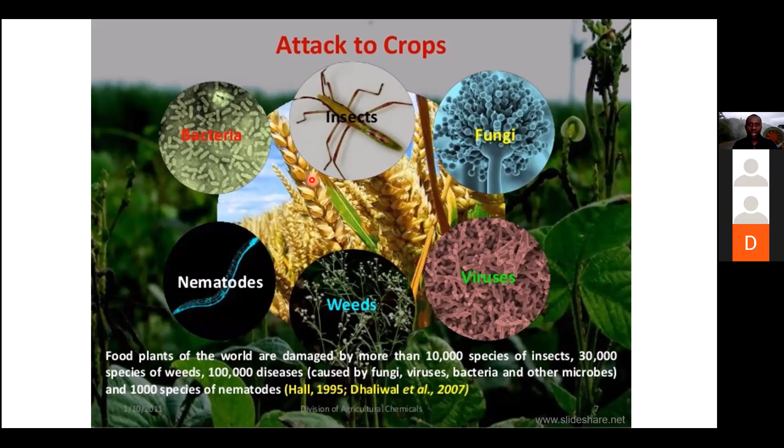However, various disciplines related to agriculture are involved in the fight against these enemies using different tools. At the farm level, various methods are involved in what we term integrated pest management. However, no matter your idea of integrated pest management, whatever the components are, the use of chemicals or chemical control - the use of pesticides - always finds itself as a tool of last resort in protecting the crop.

For that reason, it is also very critical that pesticides are used well for effective pest control the first time. Otherwise, we stand the chance of needing to repeat application and increasing production cost against the bottom line. So we need to learn more about how to do it right, so we can improve or maintain effective application.

For us to be on the same page, we need to establish some definitions here. Stay with me. First, let's look at spray. The noun form of spray refers to liquid that is delivered or driven through the air in the form of tiny droplets. So it is liquid, not gas. Spray is liquid, just that it is disintegrated into many tiny droplets, and the process whereby this disintegration is achieved is called atomization.

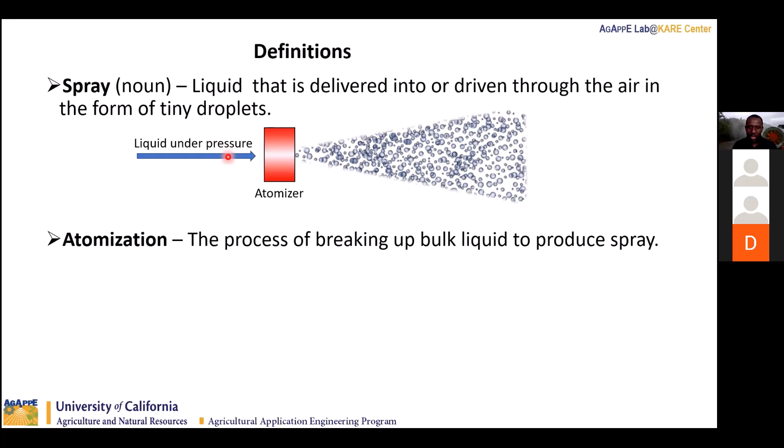This atomization is achieved when liquid under pressure exits through an atomizer. An atomizer is a device for emitting liquid as spray, an example being a nozzle. A quick definition: a nozzle is a device having an orifice through which liquid exits as spray.

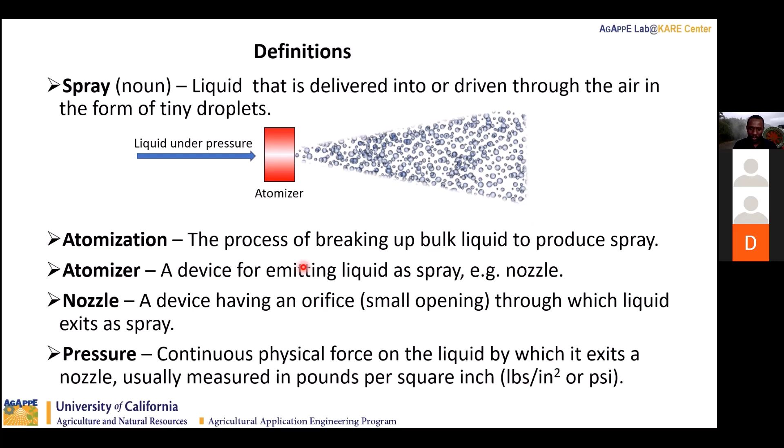Let's also look at the definition of pressure. I hope I'm not running through this too quickly, but my intention is to bring us on the same page by running through these definitions. Pressure is a continuous physical force on the liquid by which it exits a nozzle, usually measured in pounds per square inch, or PSI, in American units, or newtons per meter squared, or Pascal, for metric units. Agricultural nozzles are usually rated at 40 PSI and color coded for easy identification.

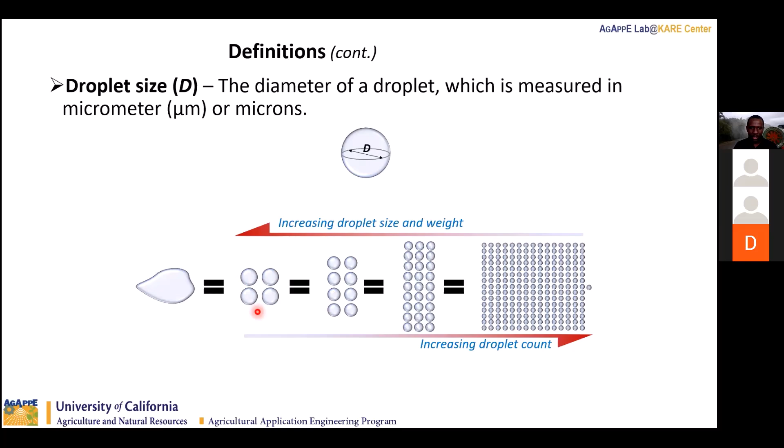On the other hand, a lower droplet count means that less area can be covered by the spray. But finer droplets present a challenge in that they are highly susceptible to drift loss from the application site, and this impacts the effectiveness of the spray application.

Let's consider droplets falling from a height of 10 feet. We can see that a 400 micron droplet takes about 2 seconds to fall. On the other hand, a 20 micron droplet takes 4 minutes to fall through the same distance. So the heavier, or coarser, the droplet size, the shorter time it takes to drop. The smaller or finer droplets will stay airborne longer than the heavier, larger, or coarser droplets.

Also, at 10 feet high, a 20 micron droplet in a 3 mile per hour wind can travel about 1056 feet before making landfall, which is 1/5 of a mile. Whereas on the other end of the spectrum, a 400 micron droplet will travel only 8 feet before making landfall. This also means that finer droplets can linger in the air longer.

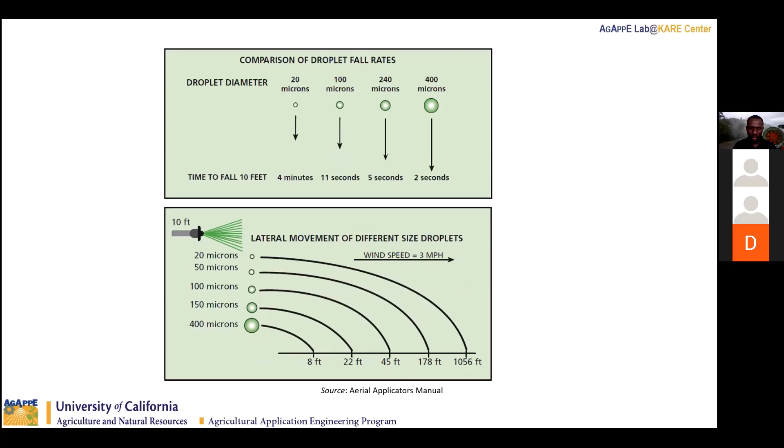Within the same spray, droplets range in sizes from finer to coarser, meaning you don't have the same size throughout - it's a range of sizes. So a representative droplet size is used to describe spray quality. The typical one is what we term the volume median diameter, or VMD, and in some literature you can also find it as DV 0.5. The VMD is simply defined as the droplet size at which half of the total liquid volume consists of smaller sized droplets and half of the volume consists of larger sized droplets.

Here are some examples. Let's assume our spray consists of exactly four droplet sizes, and each of them constitutes or is taking up 25% of the volume. This is how it could look like. The VMD will be a size between the middle droplets, because we can see this is taking the largest droplet that will take 50%. So the VMD will lie between the second largest and the third largest in this case.

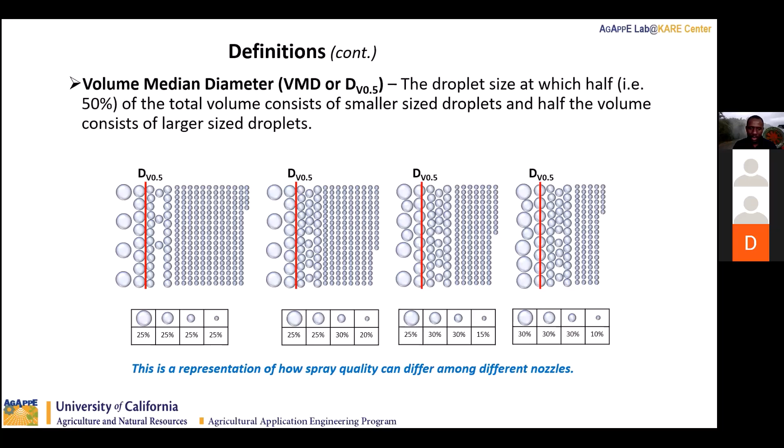The VMD, or droplet size spectrum, is represented graphically using a sigmoid curve, or S curve. Each of these curves represents spray from a different disc core nozzle. Here, D2-13 is the smallest size, while D6-46 is a larger size in terms of flow rate and droplet size. For these curves, the steeper the curve, the greater the percentage of fine droplets and the smaller the VMD. On the other hand, the gentler the curve, the lesser the percentage of fine droplets.

To find the VMD, we draw a horizontal line from the 50% mark on the curve, then draw it vertically down to find the corresponding mark on the droplet size axis. So increasing the nozzle size, in this case from D2-13 to D6-46, increases the VMD from about 140 microns to about 320 microns.

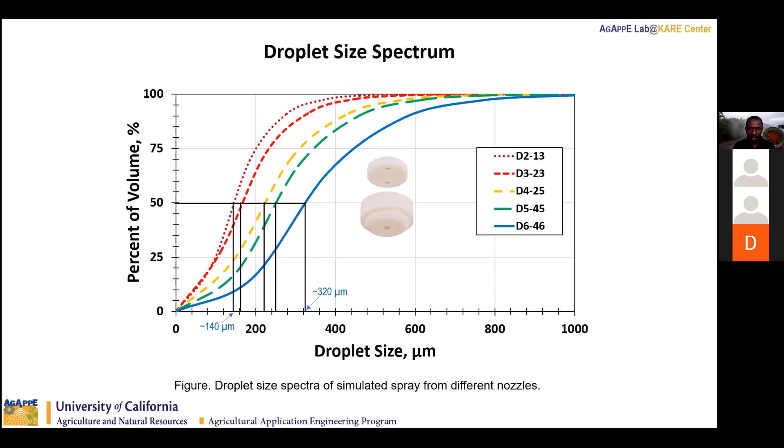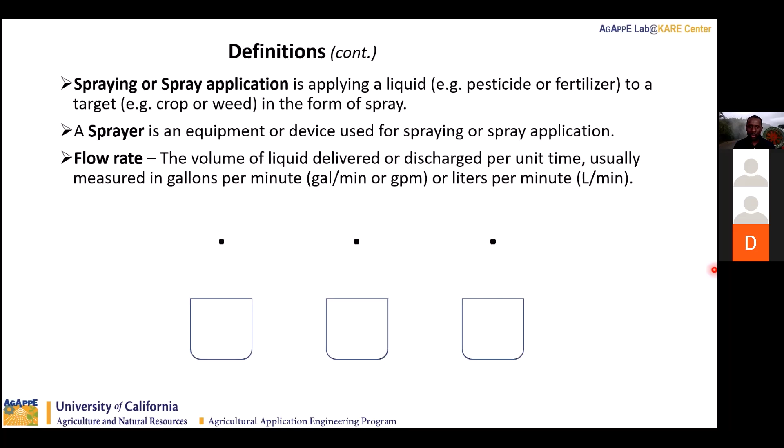So let's try to define it here. It is a volume of liquid delivered or discharged per unit time, usually measured in gallons per minute, or we can also have liters per minute, depending on the units you are interested in. In our application, mostly we use the American or standard units, and we have it in gallons per minute.

So typically flow rate refers to what the nozzle is putting out. Let's consider these dots here to be nozzles of increasing sizes from left to right, and we see for the same time, the bigger size nozzle puts out more volume than the smallest size nozzle.

And then we can also consider this to be nozzles of the same size, but increasing pressure. So the volume discharge corresponds to pressure, and as we increase pressure, we increase the flow rate.

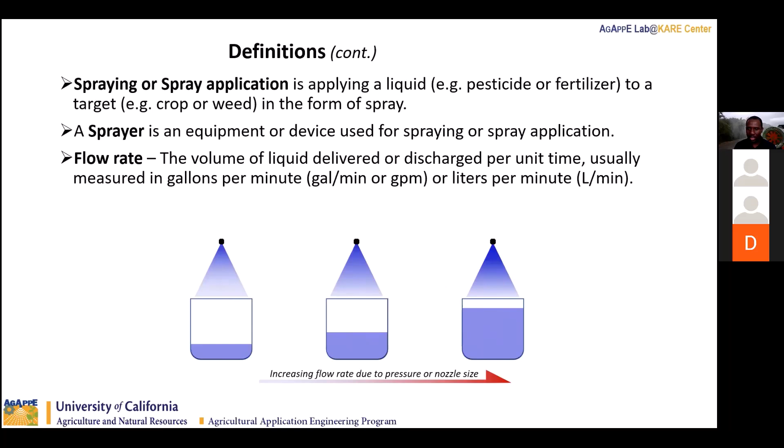So this brings us to one of the most important terms in spray application, which is the application rate, and it has to be understood within context. In its basic terms, it refers to the volume of liquid applied divided by the area covered, or the area intended to be applied to. It is usually measured in gallons per acre, or in metric units, liters per hectare.

And the volume applied can be obtained by multiplying the sprayer output, which is flow rate - a combined flow rate from all open nozzles.

Multiplying that by time will cancel out the times and give us the volume applied. The area covered can also be obtained by first multiplying the swath width—and for tree crops, we'll be looking at the row spacing—times the travel speed, and then times elapsed time. So we can cancel out the time to leave us with the sprayer output and the area rate.

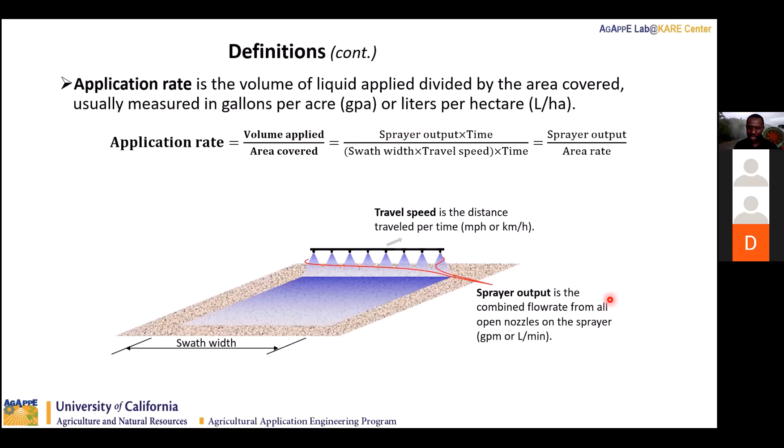So now let's look at spray methods and equipment. We have two main methods: aerial application and ground application. Although I'll be dwelling on air blast applications and so forth, my intention was to just focus on this briefly to give us some background.

For the aerial application, we have fixed wing or rotary wing aircraft sprayers, and more recently, but quickly advancing, we have unmanned aerial drones, unmanned aerial sprayers or drone sprayers, which are being used in some specialized situations. And then for the ground application, we have a boom sprayer, which works similarly to the aerial sprayers.

It applies spray downward from above the canopy. And then we also have air-assisted orchard or vineyard sprayers, which apply spray laterally to tree and vine crops.

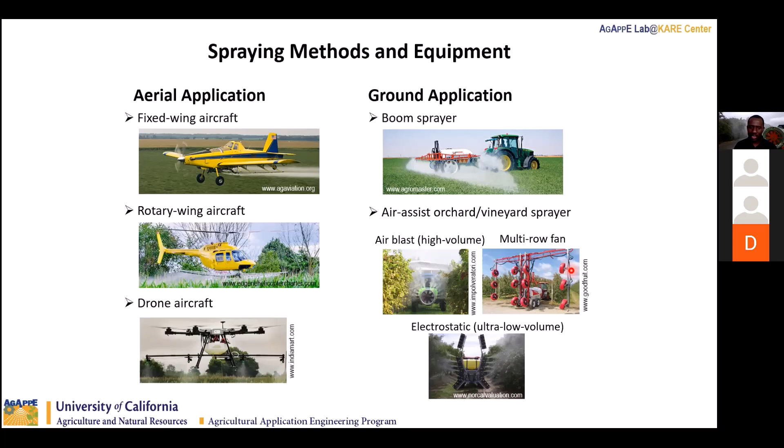So here we have other ground sprayers, like backpack sprayers, backpack mist blowers, ATV spot sprayers, and skid sprayers, and all other types that we can talk about. But these apply spray at a slower rate as there is some working involved by the applicator, so forth.

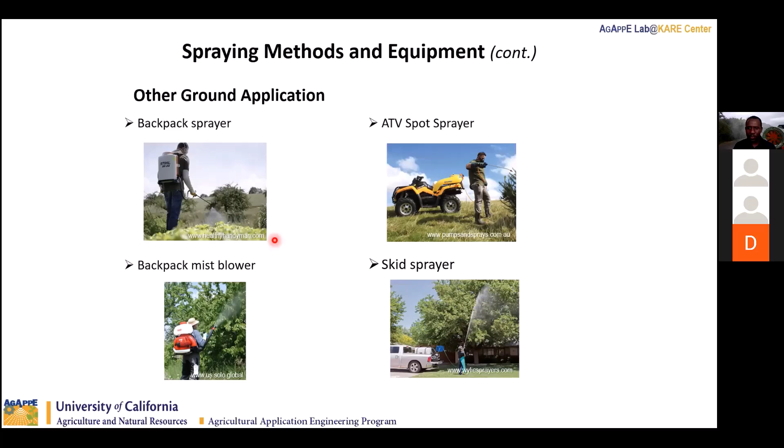All right, a quick poll here before we delve a bit more deeper and get through the ABCs of spray application. And then we'll be moving to calibration basics, as I mentioned earlier on.

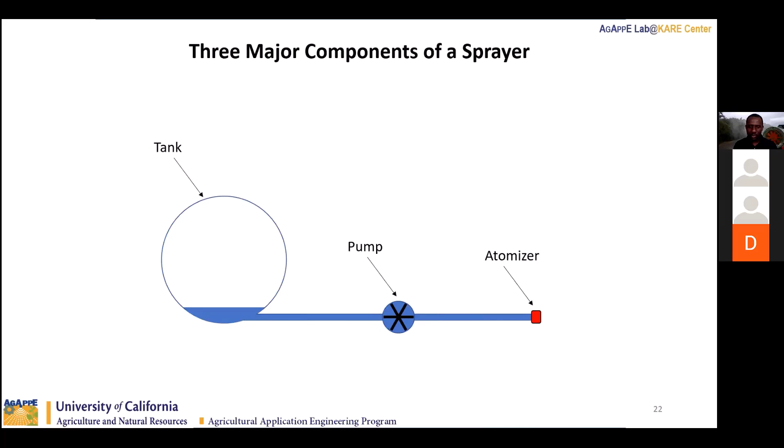Let's look at the pump. Sprayer pumps come in different types. Here are two common examples: we have a diaphragm pump and a centrifugal pump.

The diaphragm pump consists of a diaphragm, which is pushed and pulled respectively by air suction—air suction pulls, and pressure is used to push it. The push and pull action draws liquid into the pump and then out of the pump towards the atomizers. With a centrifugal pump, it consists of an impeller that turns as a drive shaft spins, and this action draws liquid from the tank into the pump, and then out of the pump towards the atomizers.

Now, diaphragm pumps are an example of a positive displacement pump. We have other examples of positive displacement pumps being piston pumps, and then we also have roller pumps.

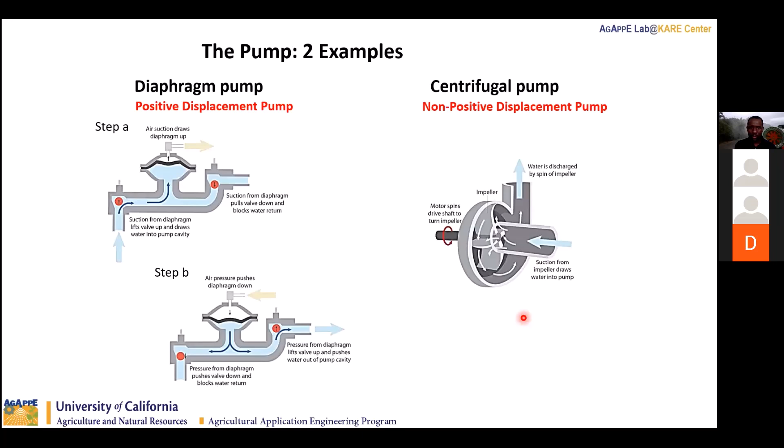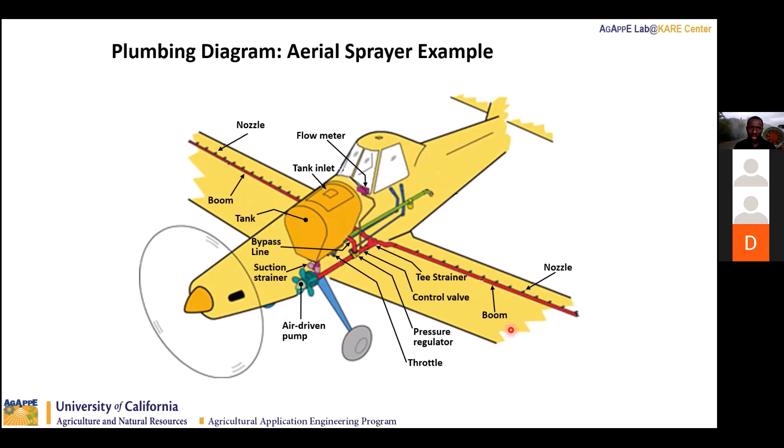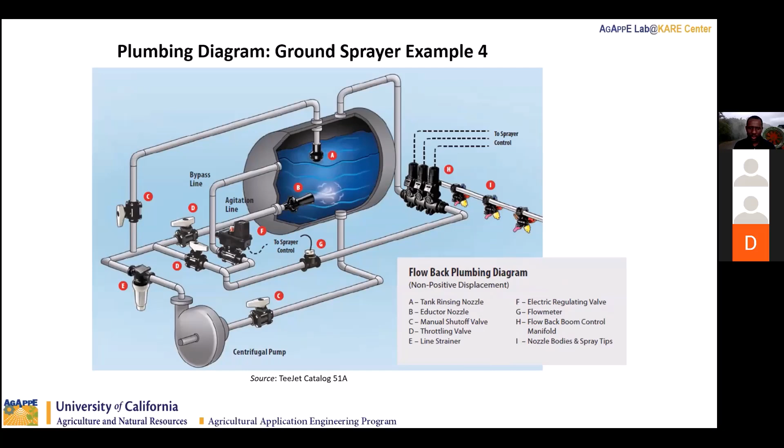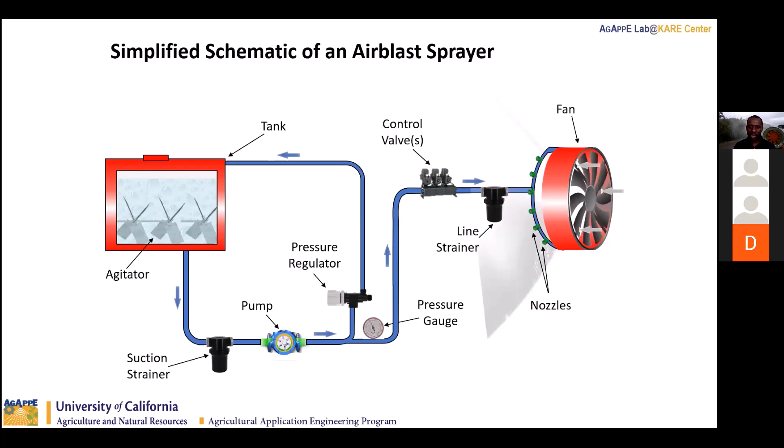The fan draws air and discharges it with the spray, and the air serves as a vehicle for transporting the spray droplets towards the target. So you have the air and a mixture of air and spray going in one direction to the left, and then a similar one going to the right. We are familiar with this, I'm sure.

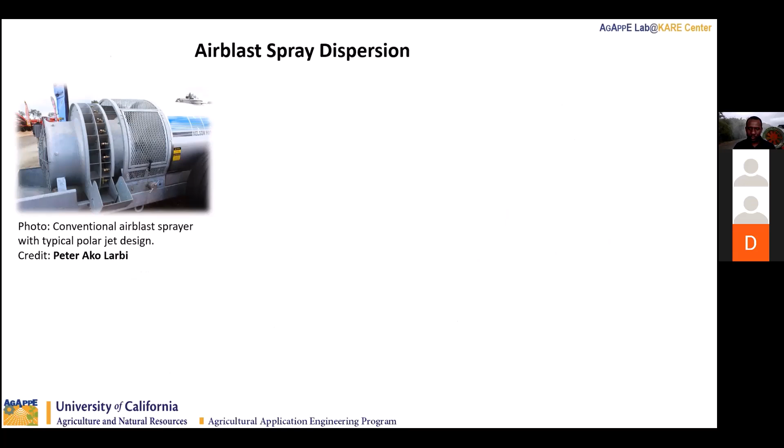Here is a conventional air blast sprayer with a typical polar jet design. And there is also a stationary air blast sprayer, which you can't see very clearly because something is blocking the view—it's standing right here. We can see how the spray is being discharged, how high and also how far from the sprayer the spray is traveling.

Now, if I were to put a tree in the way of this spray cloud, it would become our target tree, and we would expect it to capture the spray. Some of the spray will be captured by the tree. Some, obviously, will get to the ground directly, or maybe indirectly through runoff from leaves and so forth. And others would also miss the canopy.

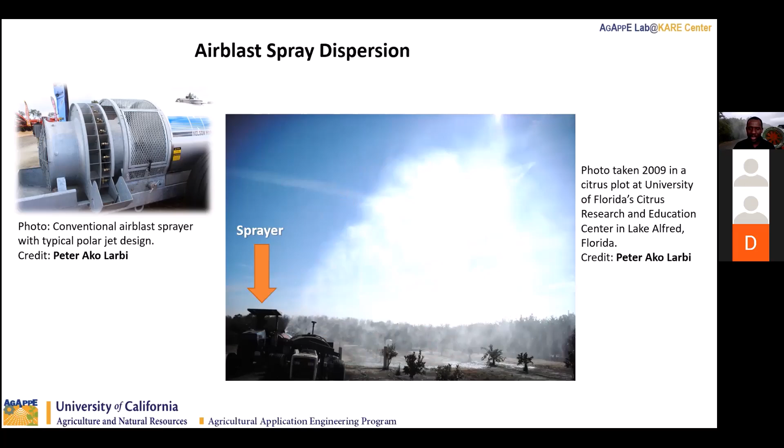So by maximizing canopy deposition, we would minimize the losses—we would minimize ground deposition and potentially also minimize drift.

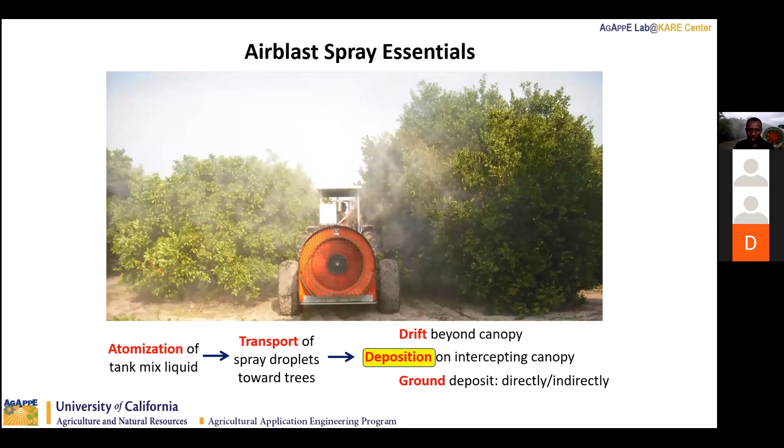And we already know of the effect of wind on droplets. Okay, so this brings us to some considerations for a good spray application. These factors would have to be considered together to result in a good and effective spray application. The operator or the crew plays an important role.

The sprayer condition and sprayer settings play an important role, as does the resulting spray: the timing, the accuracy of the spray volume, and the direction, meaning directing the spray towards the target and not missing it. All that ensures the spray we are applying reaches the target and covers it according to what we desire.

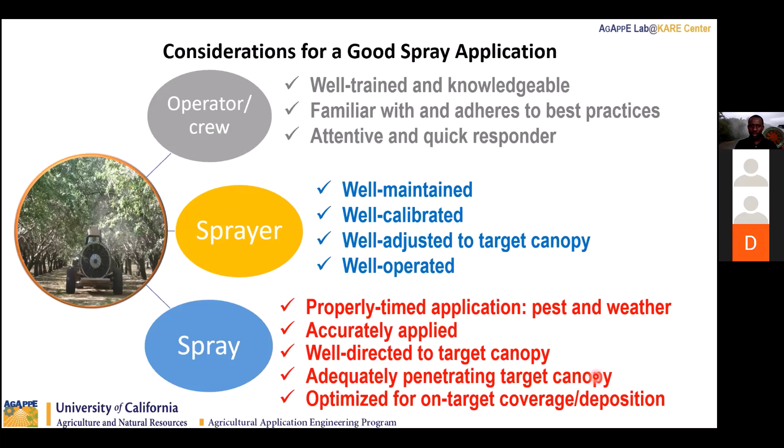Let's take a moment to do poll 6, and this would be our last poll for the ABCs of spray application before we move on to talk about calibration basics.

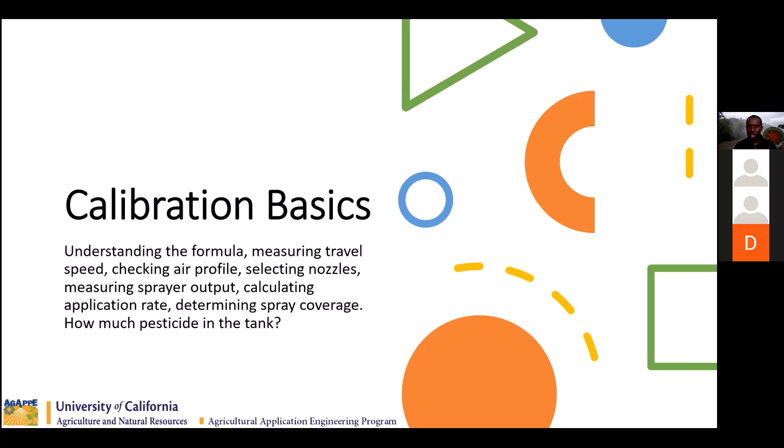Let's quickly define sprayer calibration. What is sprayer calibration? I would say it this way: sprayer calibration is the adjustments made to a sprayer based on measurements taken to ensure that the correct amount of material—that is, a spray mixture or target or active ingredient—is applied.

So it involves measurements, adjustments, and also verification and so forth. There are calculations involved, and you measure to verify that those calculations are correct.

So why do we calibrate? There are a number of reasons, and I'll run through these quickly. First and foremost, calibration is best practice in spray application. Any device meant to do something by design, engineering works drift, so from time to time it is important to calibrate or readjust things. For sprayers, it is critical to make sure the sprayer is doing what you want it to do. So calibration is best practice, and has to be done.

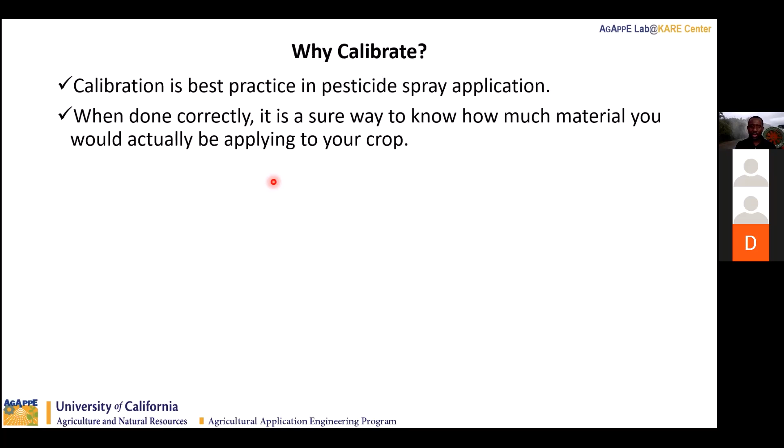When done correctly, meaning you can do calibration incorrectly and have erroneous results to work with, it is a sure way to know how much material you are actually applying to the crop. If you do not calibrate correctly, or do not calibrate at all, this can result in inaccurate application rate, because if it's off, you have no way of telling that it's off. If you calibrate incorrectly and work with that, you might be applying more than you think, or you may be applying less. So it is important to do it right.

It can result in inaccurate application rate and ineffective application in the end, and also illegal residues on treated crops, that is, if you over apply. Accurate calibration will lead to effective pest control while minimizing waste and negative human and environmental impact. This could be debated to some extent, but if things are done right, considering all the necessary adjustments we are going to look at, you should be able to improve or optimize the application. By knowing how much you're applying against the pesticide label, you would also ensure compliance with the law represented by the pesticide label.

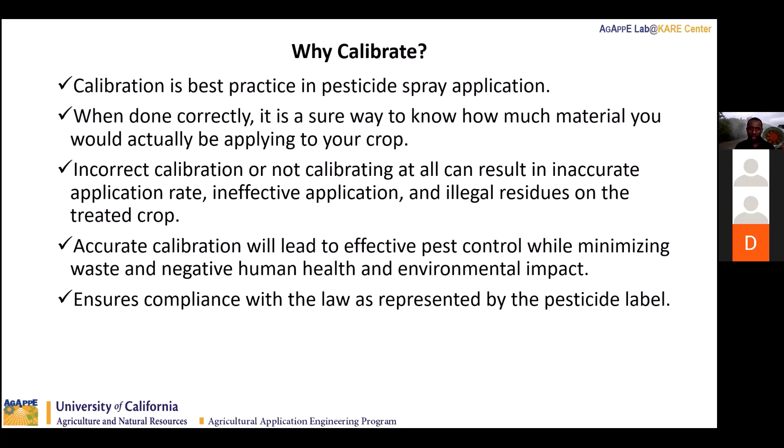So when are we to calibrate, and how many times? Ideally, at the beginning of the growing season, when things are a bit slow, or for trees that are about to get foliage and there isn't much activity going on. That's a good time to calibrate the sprayer and make sure it's ready for the more active time. So the beginning of the growing season is an ideal time to calibrate a sprayer.

Also, whenever there is any significant change in conditions in the target. For instance, if you are moving from one section of your orchard to another, and the ground conditions are different, it would be good to calibrate for both sides. What needs to be calibrated? Maybe the ground condition means you have to check speed for the same desired settings, to know how it differs from one point to another, and use that to adjust the other components appropriately.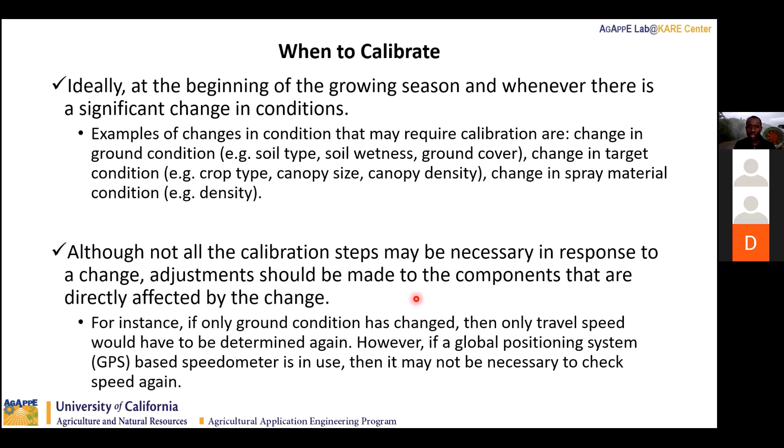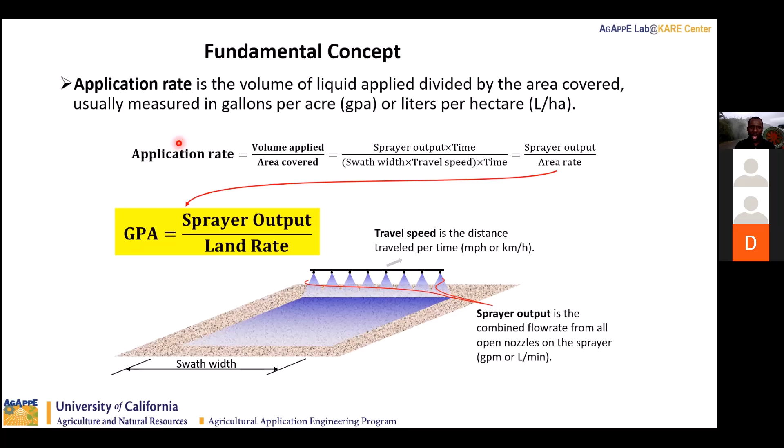This simple relationship applies to all types of sprayers, because you are looking at how much liquid you are applying over what total ground area. The calculations and computations involved to arrive at that may differ, but at the end of the day, that is what we are looking at achieving.

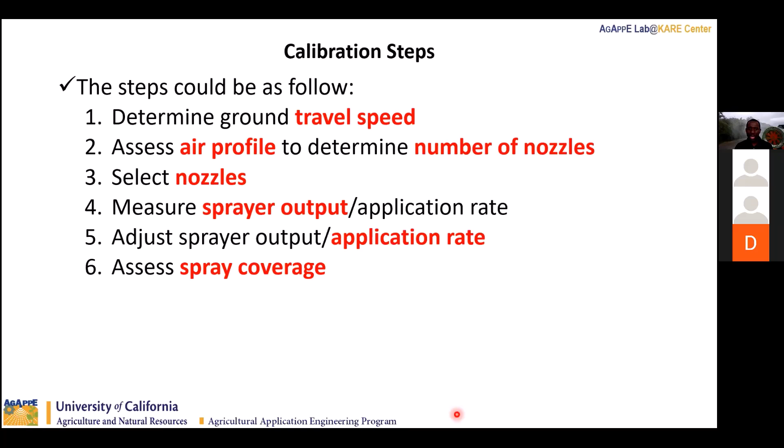The pesticide amount that goes in would factor in the application rate in order to achieve the active ingredient rate, the actual pesticide rate. But if you are targeting a particular application rate, a particular gallons per acre, then after determining the application rate from the sprayer output, you would need to adjust the sprayer output in order to adjust the application rate. Once all of this is done, it's also good to assess spray coverage to verify if all the settings would help to achieve the desired outcome.

So let's look at measuring ground speed. I'm not going to go through every single one of these, but there are many different ways to measure ground speed. A simple way is a manual known distance method, where you mark out a known distance, the sprayer travels that distance, and you time from when the sprayer reaches the first point to when it reaches the last point. That time and the distance will be used to calculate the speed.

One thing to note with speed measurement is that while observing the movement of the tractor or sprayer, you need to choose a fixed point on this combination to use to determine the speed. For instance, if you choose the front of the tractor, when the front reaches the first flag, that is when you start measuring time, and when that same front reaches the last flag, you end the time measurement. If you start measuring when the sprayer reaches the starting flag, but stop measuring when the back of the sprayer reaches the last flag, you have erred in determining the time, because you've added more time to the measurement, which reduces the speed you calculate from your test.

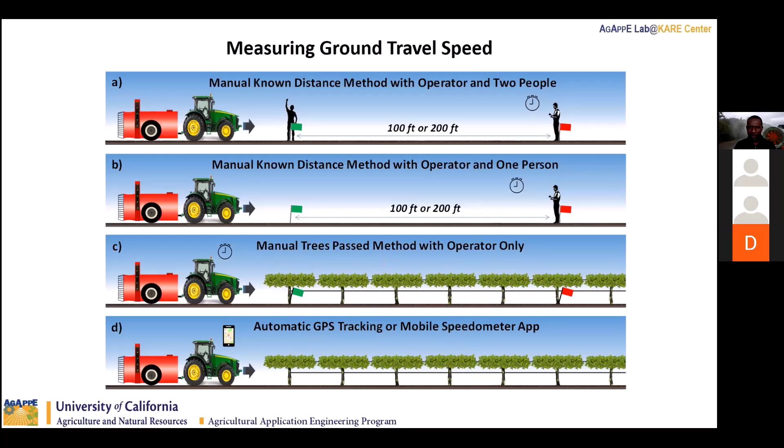You can also use GPS tracking to do that. The row spacing is measured center of tree to center of tree, and that is easy to get with a measuring tape.

Then checking the air profile here. This is in vine, but I just wanted to use a representation here for you to see. We can tie some flagging tapes to the nozzles, and then run the sprayer with the air on to see where the pieces of flagging tape point, which will give you an idea of where the middle of the spray would be. You can do that to determine the number of nozzles that would actually be directing spray to the target canopy, and use that to select the nozzles and note their location.

Once we know the number of nozzles, we can determine the desired nozzle rate. Here is the computation we can do.

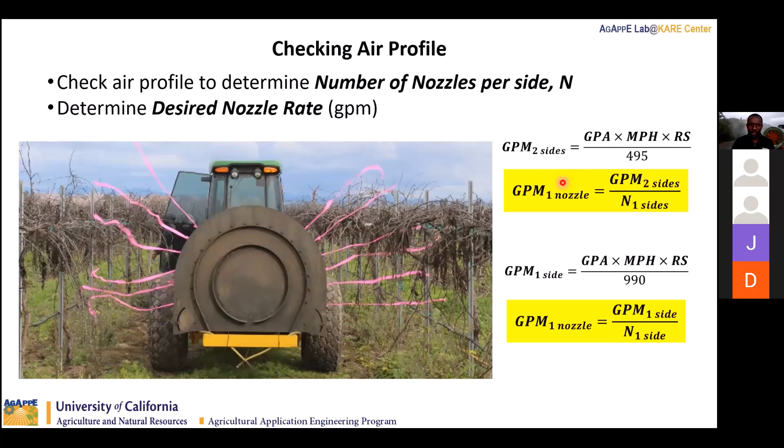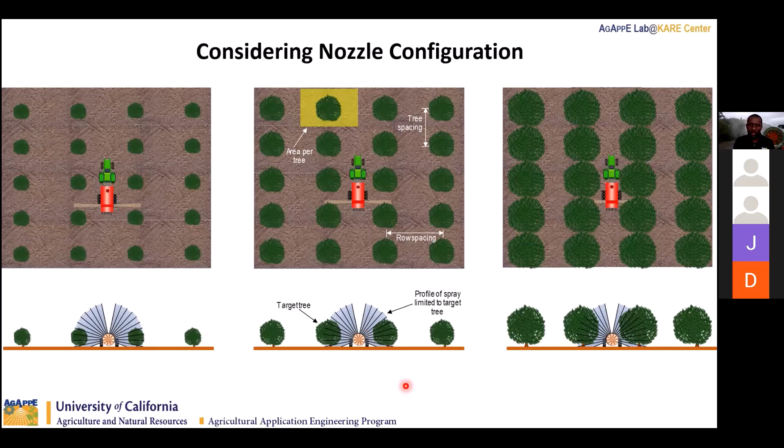Also, one thing to factor in when choosing the nozzle and the number of nozzles is when you have differences in tree size and canopy sizes. This would warrant the need to select appropriate nozzles, the number of nozzles that would result in the spray being directed on the canopy. We can't just use all the nozzles because we don't necessarily want to. So the size of the canopy, the density, all of those will have to be factored in.

For lack of time, I cannot go through all of these here, but I would say the next step is actually selecting the nozzle.

So once we have obtained the individual nozzle flow rate, and we know the operating pressure we want to use, we'll use that operating pressure to locate a flow rate that matches the calculated flow rate. It would not necessarily be exact, but the closest possible would help us identify which of the nozzles would be able to get close to that flow rate.

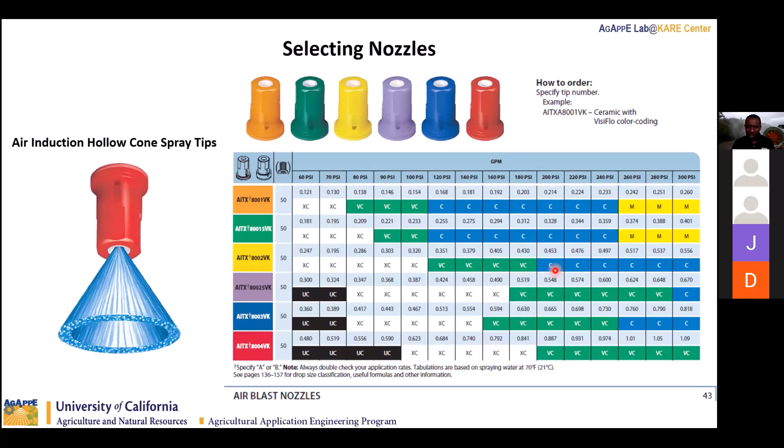If the flow rate we get is a little lower than what we desire, it is going to result in reduced gallons per acre than what we actually desire. And if it's a little more, it's going to result in a little more gallons per acre. So then we would need to do some adjustments.

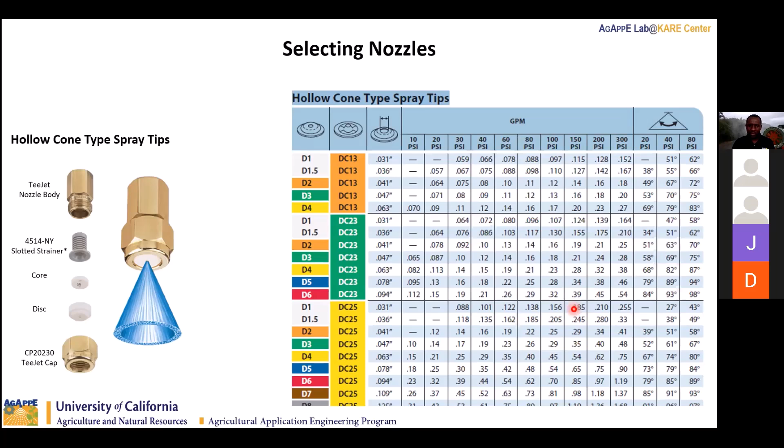Same concept here: you're looking at the pressure and using that to find a flow rate that matches the nozzle you are going to use.

Once we have obtained the nozzle, we actually have to fit these nozzles and then run the sprayer using the settings we've identified, and then actually measure the flow from the nozzle, so that we can verify if that flow will result in our target application rate.

So these are a number of ways to do that measurement. We can use calibration methods.

We can run the sprayer in a fixed position and spray for a certain period of time, say one minute, and then fill the liquid back into the tank to the level it was at the start. The amount of liquid used to fill it back would be what was sprayed out, and we can use that for the calculation.

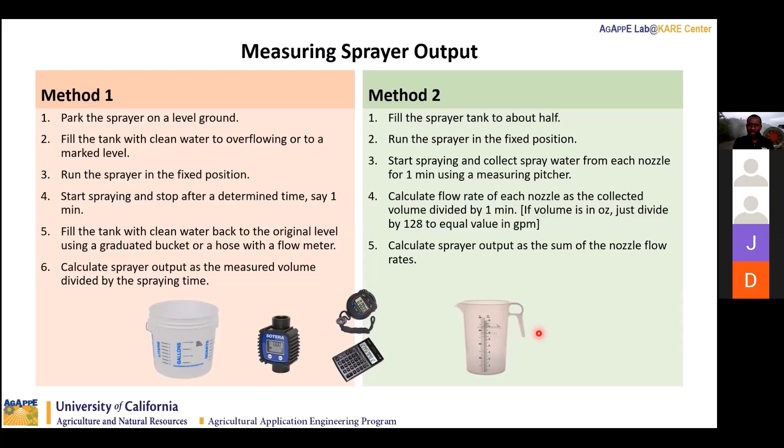We can also use a measuring pitcher to do that, by measuring from individual nozzles and checking and verifying what the flow rate is.

And then we can also use automated means. There is this nozzle calibrator, the SpotOn nozzle calibrator, which we can use to automatically determine the flow rate.

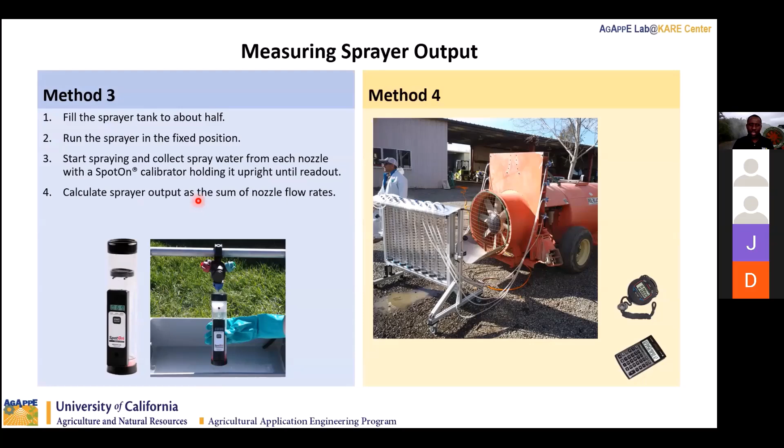There are other means to do this as well. Once we have obtained that flow rate, we put it into the computation, and that gives us the gallons per acre. It's the same formula as before, just rearranged to get the gallons per acre application rate again.

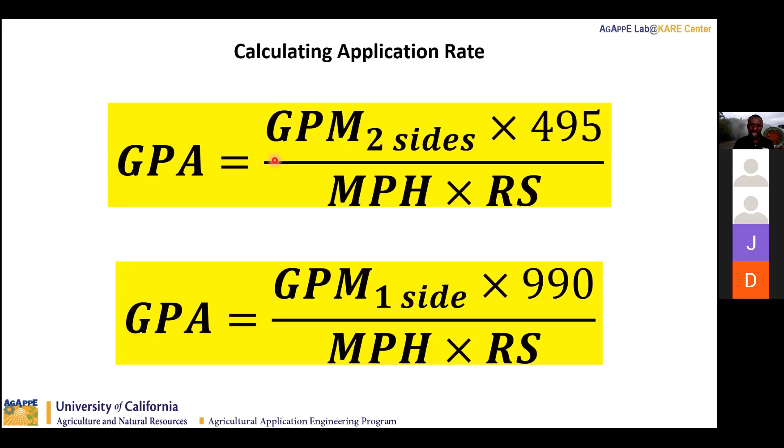Then we would see if that application rate matches what we started with as our target application rate. Once we've done that, some people would stay with that and rather adjust the tank content instead.

But if you want to stay on that same desired application rate, you can make two adjustments: one is adjusting for speed, and the other is adjusting for pressure. Here, the desired is what you want to arrive at, this is what you have measured based on your flow rate measurements, this is the speed your sprayer is traveling, and this is what you are actually trying to target.

If you put all of these in, you would find the new speed that you can use to achieve exactly the desired gallons per acre.

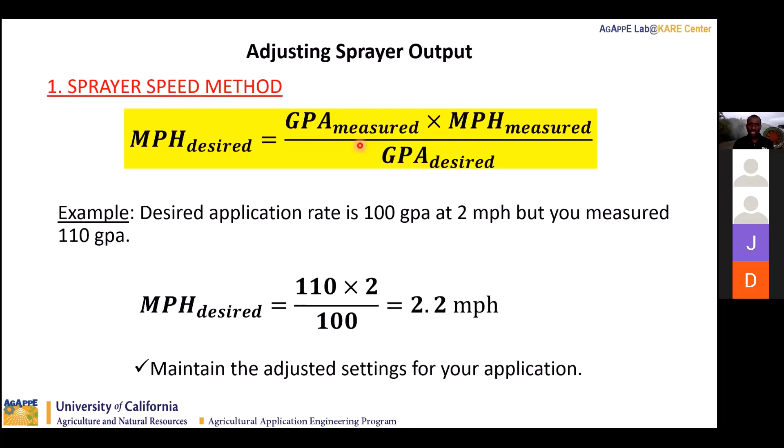In the same way, there is also a relationship—this formula would also give you the new pressure that would give you the desired gallons per minute to produce the gallons per acre that you desire.

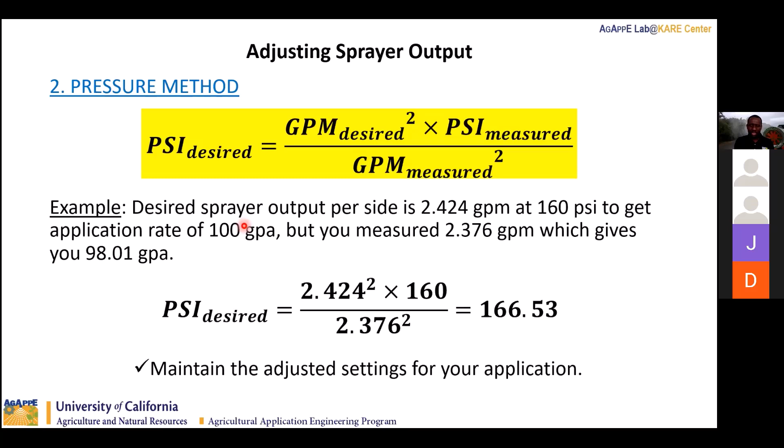These are additional steps you can do if you want to arrive at that same target. I was going to look at all these spray definitions, but I'll skip this.

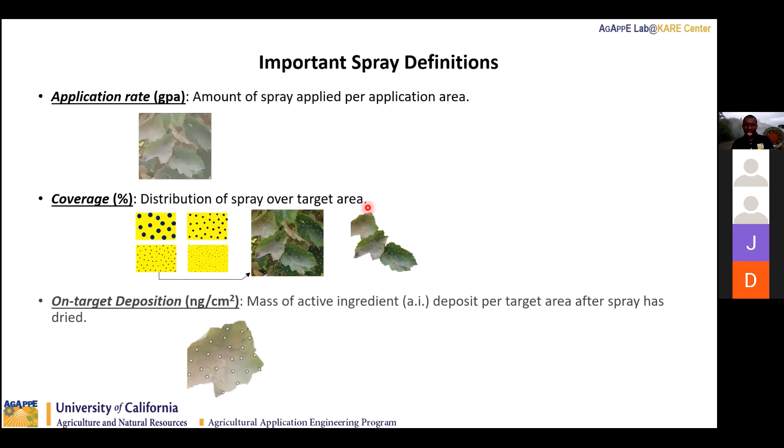Once we are done with all the computations, the next step is to assess the coverage and determine what it is. We can put water sensitive cards—these yellow cards that turn blue—in different locations of interest within our canopy, then spray with the settings we've determined and see what the outcome is at different locations.

Based on that, we can make additional adjustments to make sure the spray is reaching where we want it to go. So with this, let's do this quick poll, and then we'll take our break.

While they're doing the poll, we have another question: is there a program for analyzing the spray cards?

Yes, if I go back—there are methods to do that, but there is an app called Snapcard. This is a free app you can use to do a quick determination of the percentage coverage, so you can quantify it. You can do the computation and determine how the percentage coverage differs from point to point.

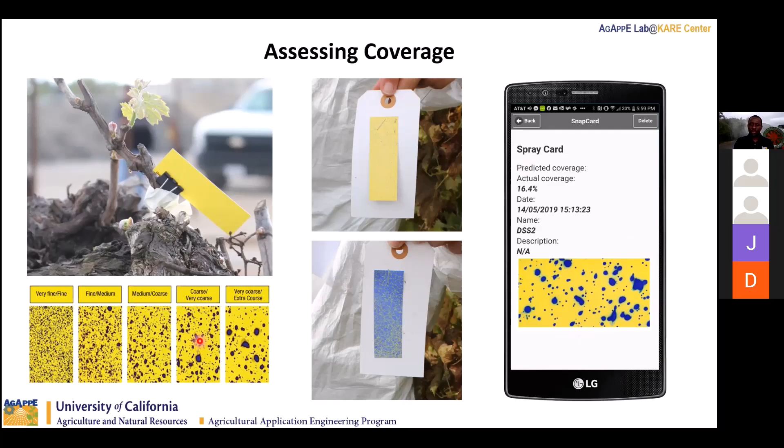Otherwise, you would have to just use visual inspection to compare how much spray is reaching one location as compared to another.

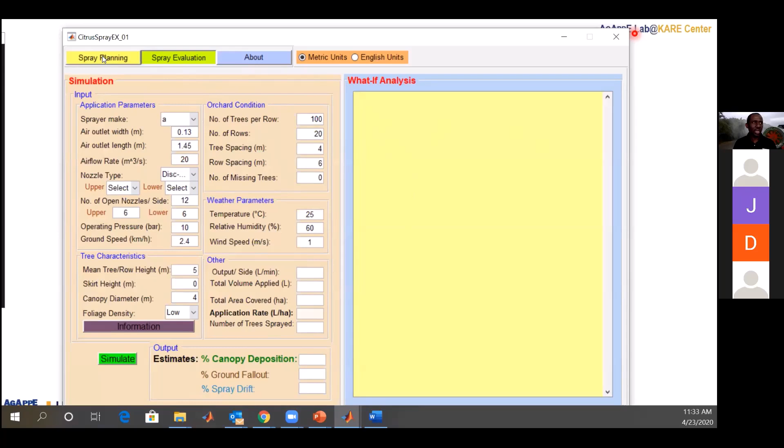Now, as we go on, I just want to say that this is not a perfect system. The idea of our project is to gather inputs from people as they use this, and also get a sense of aspects that are desirable, aspects that are not desirable, and components that can be added to improve it. In the long run, this is not what the final output is going to look like.

We intend to develop a new expert system that would be online and also mobile friendly, so it will be an online application which can be accessed using a mobile device. These inputs and outputs that you see here are going to be some of the base ones that we'll be building on. So if there are components that we think are not useful based on the feedback, we would adjust them to make them more useful to the intended users in the long run.

So please, as you engage with this, I would encourage you to take note of aspects that you think could be improved. We would be happy to receive your feedback and incorporate some of it into developing the new expert system we're currently working on.

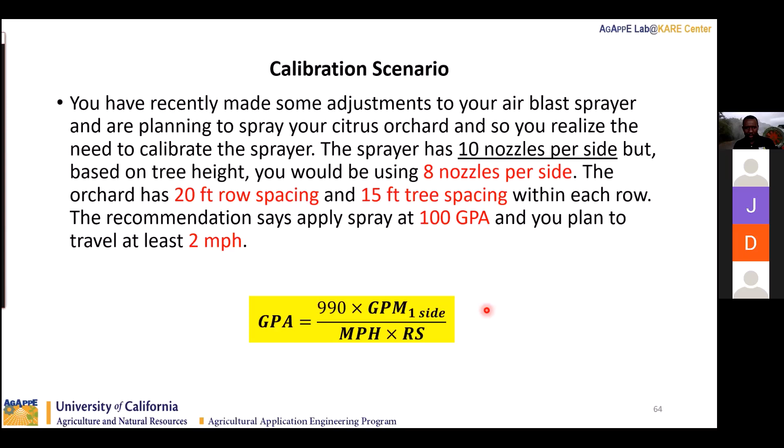And one thing I missed to point out is at the top here, you see that we have units in metric and also in English units. In this part of the world we work more with the English units, the American Standard units, so those are the ones we will most often be using.

So if you put the values in, it gives you - and you click on calculate, it gives you what it should be.

And the other point is using the trees passed method. Here we are changing the values - let's say we have changed the settings of our sprayer, and then we enter these inputs here, and now we are obtaining a ground speed of 2 miles per hour based on these entries.

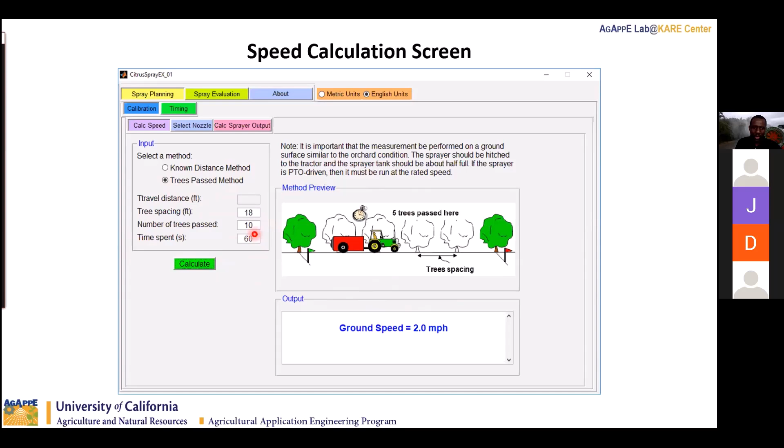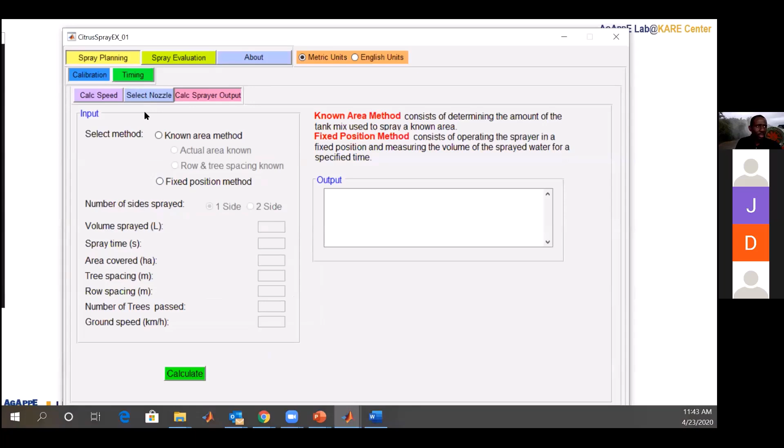So the next thing is determining the nozzle rate, and you have the tank mix specific gravity. When you start, I think the default is 1.0, or 1.2 is a default value - yeah, this is what you have as default. You select English units, and you would make all the inputs here.

Once you do that, I also want to point out that the specific gravity is based on a tank mix that is different from water, but based on our calibration, we basically use water. So we maintain this as 1, and then the rest of the values will be based on the scenario presented here - we are using a ground speed of 2, row spacing of 20, number of open nozzles of 8.

And we are assuming that we are applying uniformly from each side, so each nozzle is giving out the same output. So if you select that, and then select the operating pressure to be 150, it gives you - it recommends the nozzle output.

I'll point out that in the program you've installed, the comparison part is not working. I think there was a bug in there when we finalized it. When I run it, I get output both from the installed version and from the web-based one we're improving. So pardon me if you miss this part, but the output and recommendation part should be sufficient to give you the information you need.

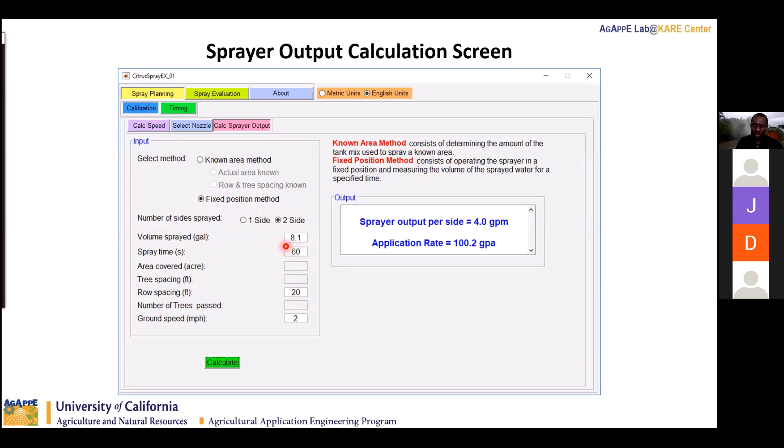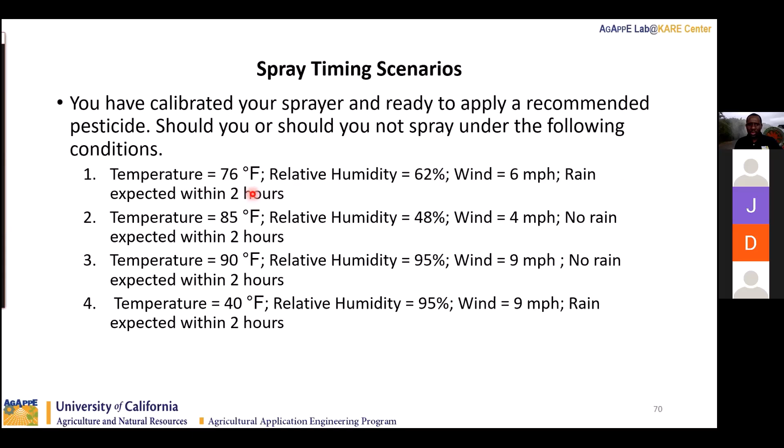So these are some other scenarios for determining whether the spray timing is appropriate or not. You have temperature input, relative humidity input, wind speed input, and whether rain is expected in 2 hours or not. And you use that information. As you work through this, regardless of how many inputs are filled, the comments pane would still give you some output telling you whether it is suitable or not, and the explanation would give you additional information on why it may be suitable and why it may not be.

So these are some examples that you can see as you make these inputs. It's saying this is too dry, and then giving an explanation of what is going to result, or giving further information based on that output. So we have other examples as well.

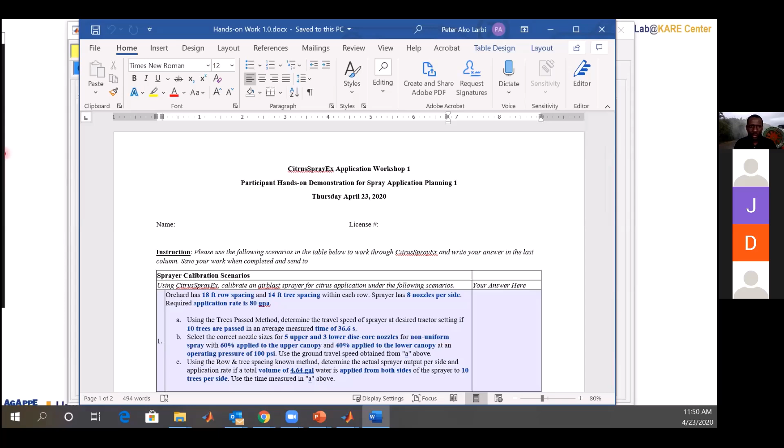This is supposed to quickly take you through it, and I would come back to the software itself. I would say go ahead and work through the ones that I have provided to you, and use that as your experience through it. I'm going to go to the chat and see if there are any feedbacks from you. I would try to address any questions if you're bumping into any trouble making these inputs. I'll look at the chat and respond based on the questions I see. So go ahead and work through the documents that were sent to you.

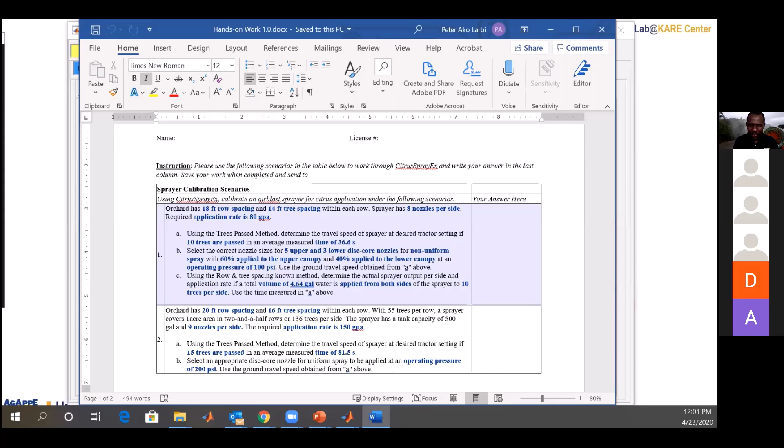I'm looking at 1B and it says select correct nozzle sizes. Would that be the nozzle capacity in gallons per minute? No, that would not be the nozzle capacity in gallons per minute. That should be the nozzle supposed to be the one recommended in the output and recommendation pane. It says recommended TeeJet nozzles, upper nozzles NA, lower nozzles NA. Oh yes, if you should choose.

Let me look at the question. Which one are you looking at? Are you referring to question 1? Question 1, number B? Oh, B. Okay, yeah.

And then I just keep getting an error that says increase pressure. Oh okay, what pressure are you using? It says to use 100 PSI. And you're not getting anything? Correct. Okay, so in that case, go ahead and choose a different pressure and report that in your answer. Do you follow that? Yes. You can use a higher pressure and just tell me you used a different pressure from 100 psi. Say if you use 120 psi, tell me you used 120 psi, so I know you used that to get your final nozzle. Was anybody else having the same issue?

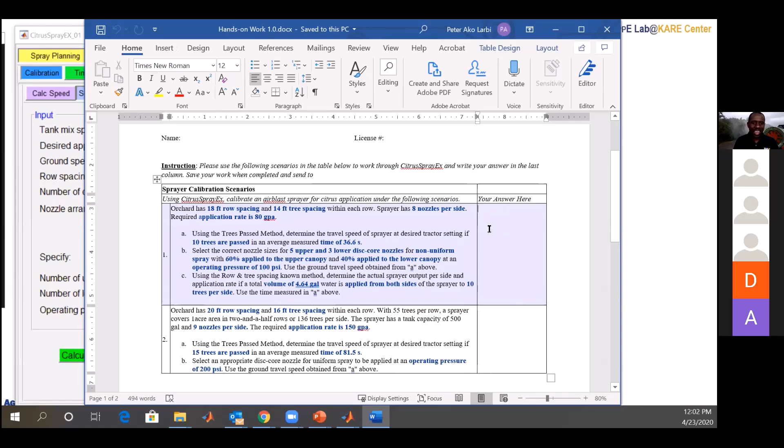I don't know if anyone is having the same issue. It's okay if you select a different nozzle and a different pressure and just report that you have used a different pressure.

I keep changing the operating pressure from 100, I keep increasing it, and it still keeps coming up with NA. Okay, so probably one of your inputs is not correct. Do you mind if I walk through with you to see what you have entered? Yes, that's fine. What do you have for your tank mix? 1. Okay, and your desired application rate? The default of 1200. Oh okay, so that is where you are erring. Oh okay. So if you read the question, the application rate is stated. Oh okay, I thought that was the default number. Thank you very much. Okay, all right, you're welcome.

So I just answered one question concerning the second part on the spray timing scenarios. The response I'm looking for is just from the comments. No need to include the response from the explanation pane, just the response in the comments pane is what I need.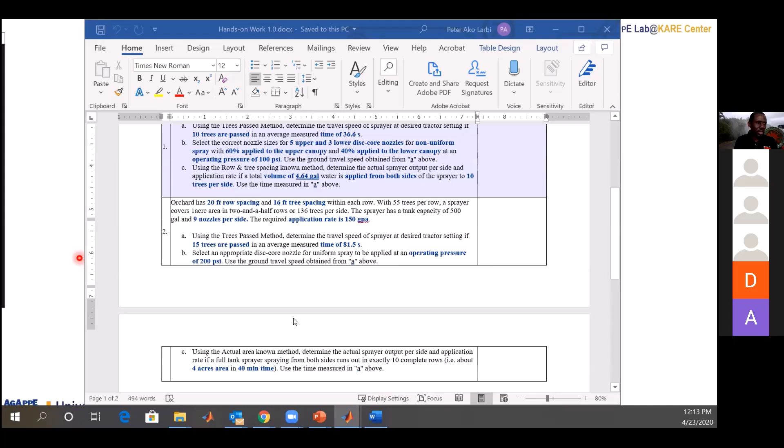Okay, so this one says the full tank was sprayed. So you have to go back and look for the tank capacity.

Do you see that? Would that be helpful? Let me see, spray time. Then the spray time needs to be from the beginning of the question, 81.5, or from the end, 40 minutes. You said the spray time is what? Spray time should be 40 minutes or 81.5.

If you look at the information provided here, the spray time should be what has been provided directly in section C. That is covering the entire four acres, if you read it right. So how much is it? It will be 40 minutes. You need to close that. Do you follow that?

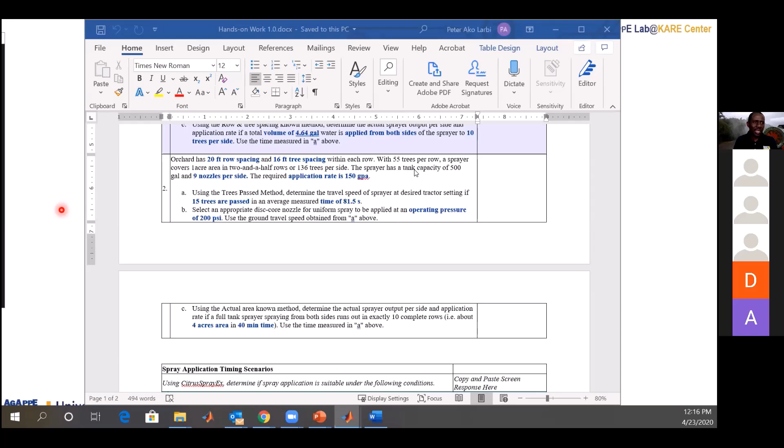The orchard has 20 feet row spacing and 16 feet tree spacing within each row, with 55 trees per row. A sprayer covers 1 acre in 2.5 rows. So that is giving that information. It's not highlighted because I've made it a bit easier to relate. You will not necessarily be using this information directly, so it's not highlighted. The sprayer has a tank capacity of 500 gallons and 9 nozzles per side.

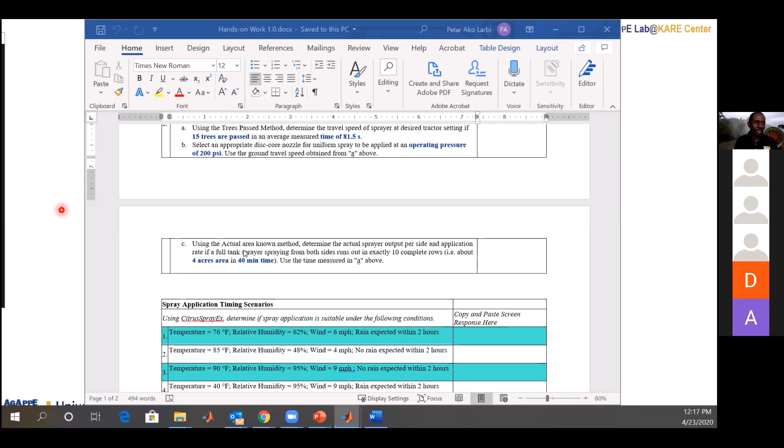If you come to see, it says determine the actual sprayer output per side and application rate if the full tank is sprayed, and the full tank has been provided here as 500 gallons. So you already have the volume that was sprayed, and that volume was sprayed in 40 minutes, covering this number of acres. So you have all the inputs for that question: two from here, and one from the initial information. Do you see that?

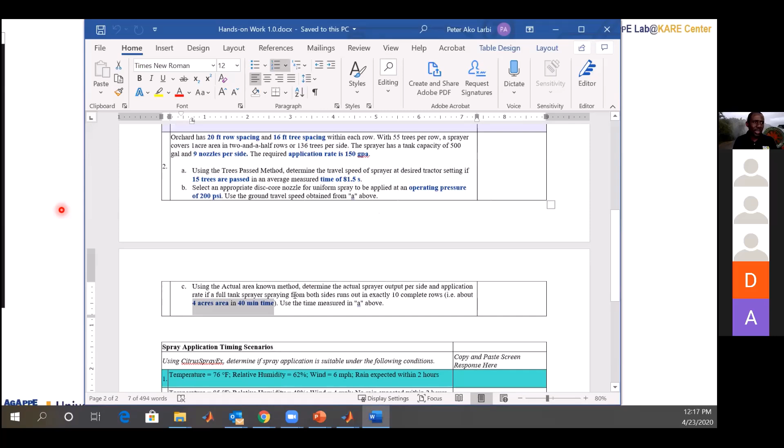Are there other people who are having problems with this particular question? I'm not sure everybody's there quite yet.

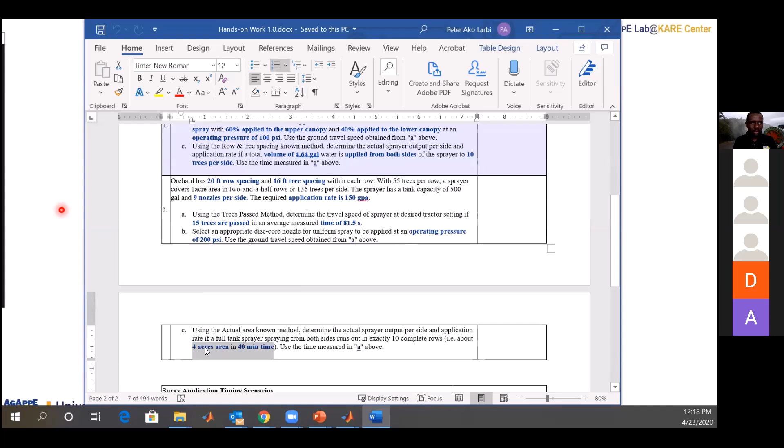Peter, if we're going to have this tomorrow again, would you mind sending the handout early in the morning so we can print it? For me, it will be much easier to have it printed instead of coming back and forth from the Word file to the software. Okay, thank you, what can we do so it will expedite things.

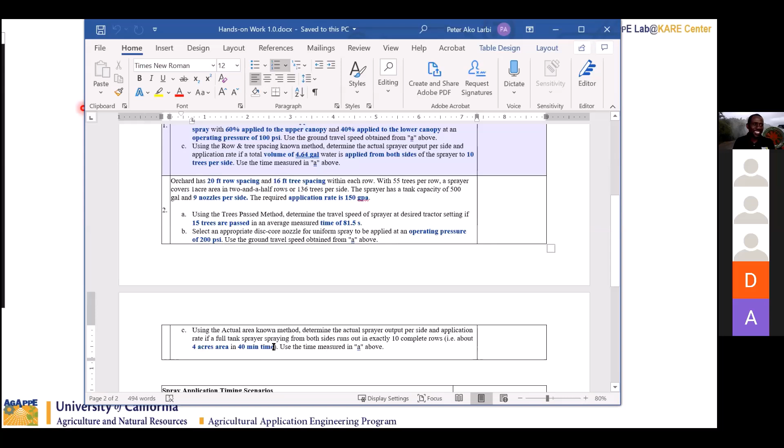The only thing is, because we are counting the time, we would want you to be able to sit in. So if you receive it ahead of time, it's sort of like jumping the gun. I understand, but for me it will be much easier if I have the numbers printed and can see them instead of going back and forth sharing screens between the Word file and the software. Okay, how much time before the start would be helpful for you?

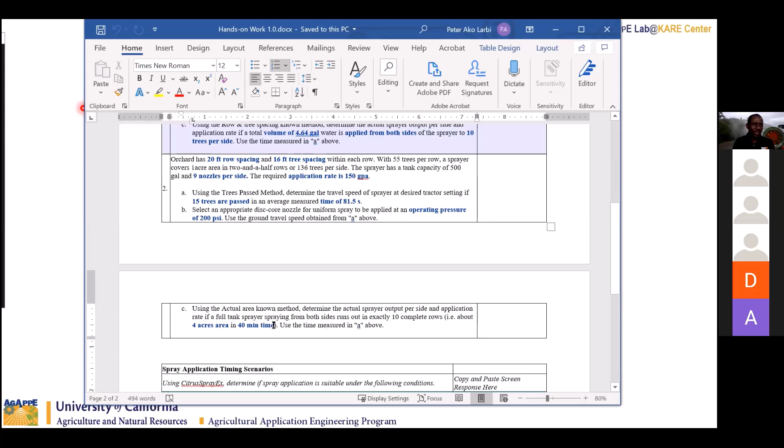Maybe during the break I can print it. Okay, tomorrow's hands-on would be earlier in the day. So half an hour before we meet? Maybe 30 minutes before the time, would that be useful? Yeah, that would be great. Okay, all right, we'll look at that. Thank you, Peter. You're welcome.

So we are nearing the time we would adjourn. We would be adjourning at 12:30, and I would want to ask if some of you are facing any particular challenges with any of the questions here. If you're done with it, I would encourage you to explore, make changes, try different aspects, and see what you can learn from that. Based on that, I would hope to get some feedback from your interaction.

For number 2C, for the volume sprayed, do we use the 500-gallon tank size? Yes, that is what the information is telling you. It says the full tank was sprayed, so that is what you'll be using. Okay, thank you.

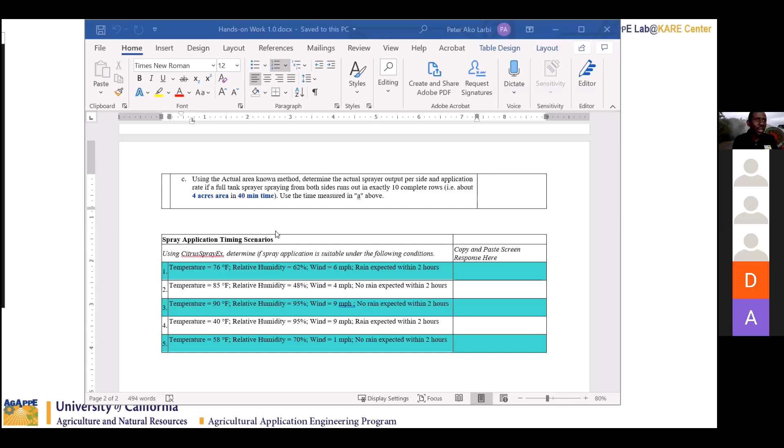I've been receiving a couple handouts so far, so people look like they're finishing it up. I understand that most of you, or some of you, are submitting your work through, so that is a good thing. Thank you, and I'm looking forward to continuing this and completing it tomorrow. Tomorrow we'll be looking at the spray evaluation part.